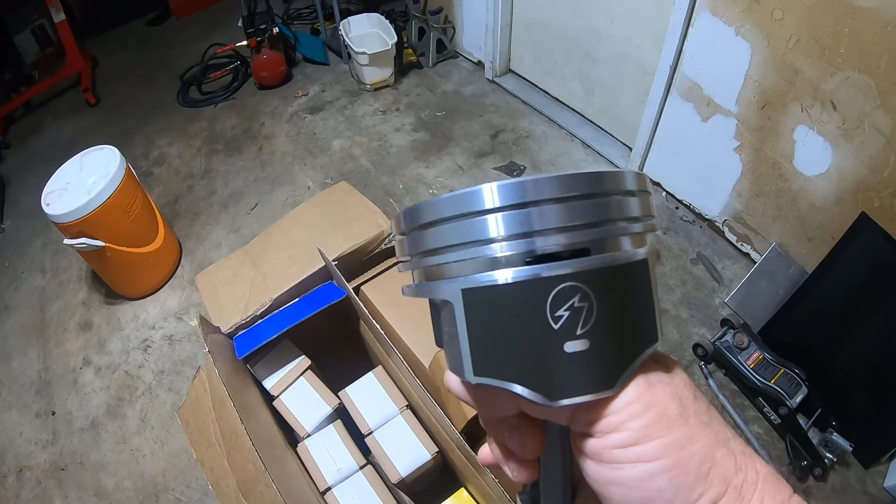We got one of the pistons out here. These are hypereutectic pistons, which means they have a high silicon content in them with the aluminum. That helps with the heat transfer, and they don't expand as much under heating. So you don't have to worry about cylinder binding as much in the bores as these get really hot.

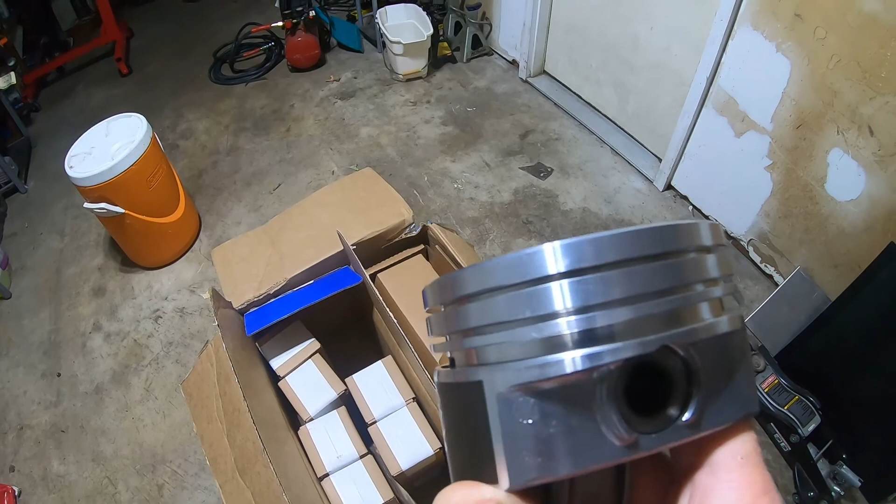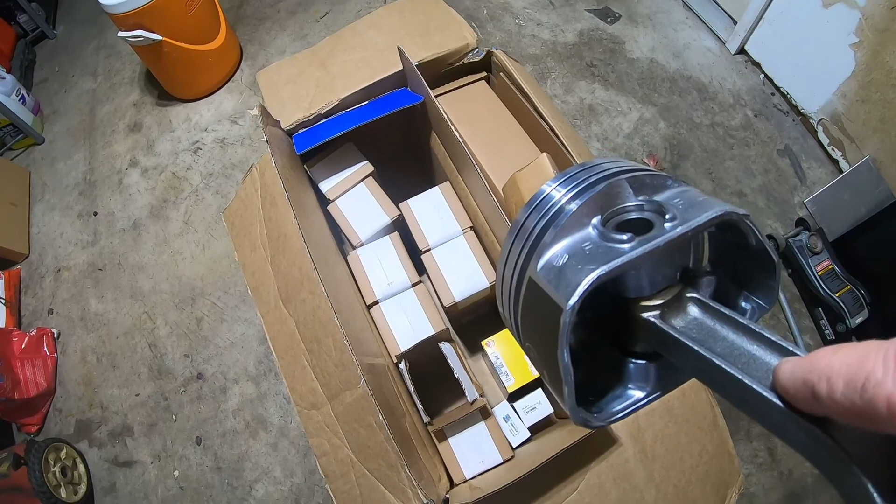I was surprised. It said in the description of the kit that it had pressed pins, but it was not assembled, but they came assembled. So that's money I'm going to save right there, because the machine shop's not going to have to heat up these wrist pins and connecting rods and press them in. So that's already done. Nice with the shaky sound on it.

So another good thing about this isn't unique to Eagle. Almost everybody making pistons now is putting this Teflon type skirting on it to help with it sliding through the bores, less friction. So that's that silver titanium pewter or whatever color look to it. So they do have the skirt protection on it.

There's your ring grooves right there. Top compression, second compression, and then the oil scraper and the 2 oil rings go in this bigger channel down here.

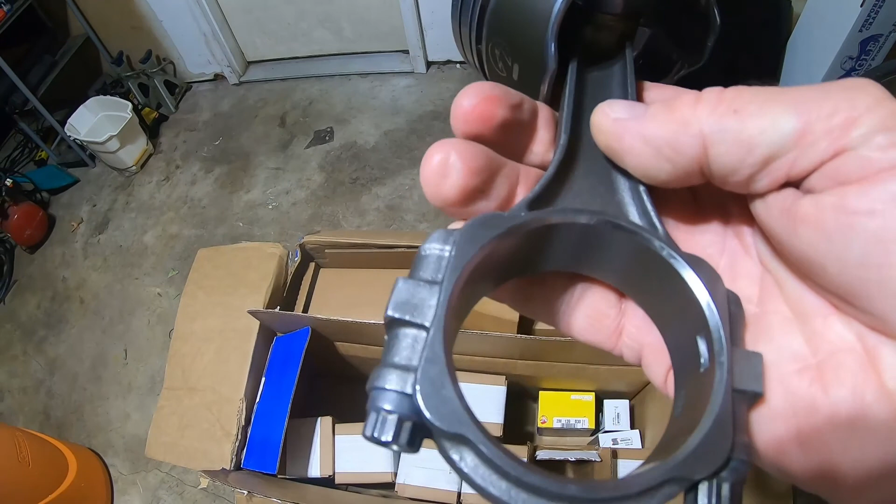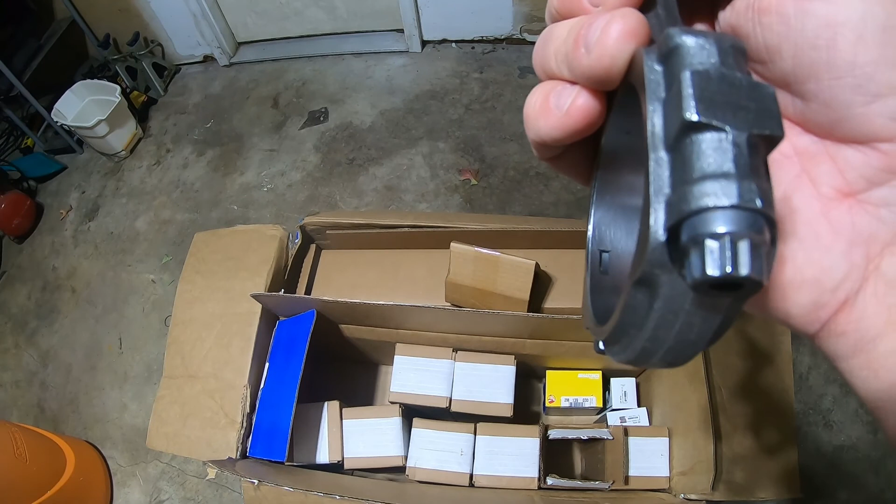Now, one thing about these rods, they're not high performance, but they do say they're rated up to 500 horsepower. The first thing I noticed on them is that these are not cracked rods. They're cast rods, but either way, they were not made as one piece. So they don't have the cracked separation joint. These are just kind of put together as 2 different pieces and then bolted together.

So they're not technically as strong as cracked rods, which are matched to each individual casting. They'll cast the lowers and then the rods themselves separately, and they just, I guess, do light machining so they're flat and fit together. I don't know if these are ARP, let me read on these. They do have ARP bolts, connecting rod bolts right there. So those are really nice.

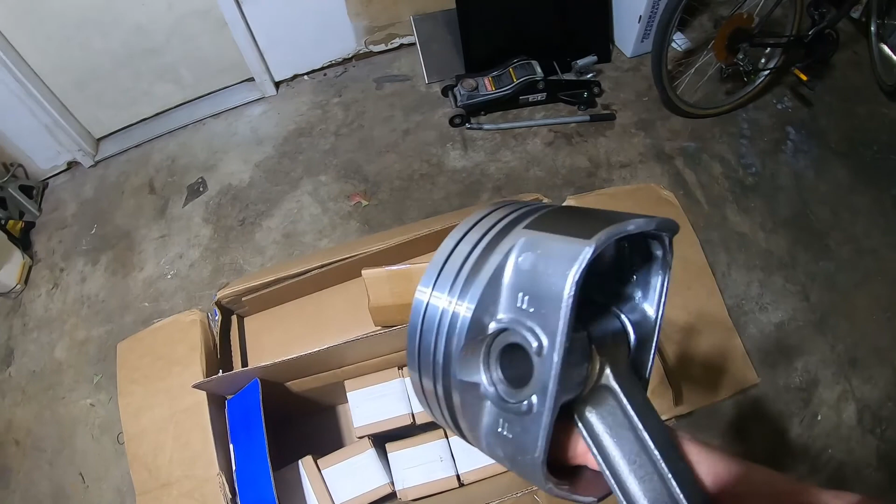Everything I've read is these pistons work great. For anybody that isn't trying to blow through the quarter mile at warp speed, these things make great street/strip pistons. So that's why I went with them.

Came with a ring set. Now these are steel moly. They're not chromoly rings. These will be fine. I'm not going to do any real boosting with these rings or anything like that. So I can accept a little bit of expansion with heat, and I'll just gap them if I think I want a little extra protection.

Instead of going like 16 to 18 thousandths on the ring gap, I'll bump it up to 20, 22 thousandths. I'll file them off a little bit just to get a little extra protection. Make sure they don't bind up if I do get really saucy with it at some point.

Hastings rings, which I've heard of before in my limited experience with engines. I know the manufacturers, and Hastings has been around for a long time, so I have no doubt these rings will be good. It's got the 3 different sets. I haven't cracked any of this open yet. All the top rings are here.

And you got your second, well, these are your oil rings. I always call these the wiper. It's those little squared groove rings. I always called that the oil wiper for some reason. But anyway, they're there. Here's your second rings right there. And then the oil rings that go on top and bottom of the wiper are down here. So got all the rings.

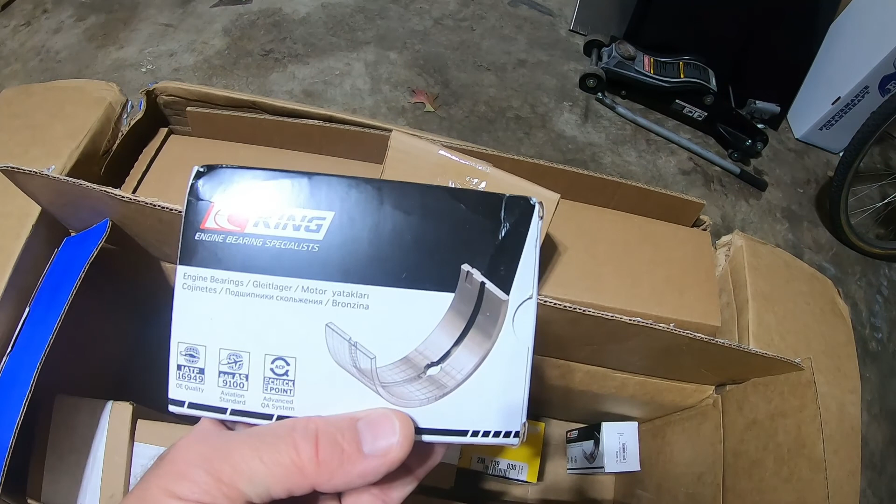It also came with bearings. Now, King, I have not necessarily heard of as a bearing manufacturer. And I'm not sure these bearings are the ones that are going to end up in the car. I may step up to better bearings. I'm going to do some research on them. I don't even know what these are made out of, if they're just aluminum bearings or whatever other type of material they use to make bearings. Just going to have to get on the interweb and see how these rate out.

Bearings are so important. You do not skimp on bearings. And if I can find a better set, I'll probably get those and just set these aside or sell them or whatever. So anyway, those are the main bearings. Then we got the rod bearings right here. Same manufacturer, same material. So same deal. I may step up for better bearings all the way around on this engine.

Then the other part of the rotating assembly, down here, there's our brand new crankshaft. Look at that guy. I am not going to take this out of the plastic until it's absolutely necessary. I do not want to, in any way, shape, or form, damage this thing. So it's a nice, new, cast steel crank. Heavy as hell. I'm not going to move this at all. I'm not even going to think about it.

I'm actually currently hurt right now and under some doctor's care. My back is messed up, so I'm not going to be doing anything silly. But let's see if I can get this.

I just noticed this when I was looking at it, but the oil journals in the crank have a nice chamfer on them. I don't know if that was ever done from the factory; I always thought that was something somebody did after the fact. It's kind of a hot rodding tip. If it is, then they've already done it for me. If not, I'm just mistaken and never noticed that that's the way oil galleys look on cranks from day one. I just never paid much attention to that part.

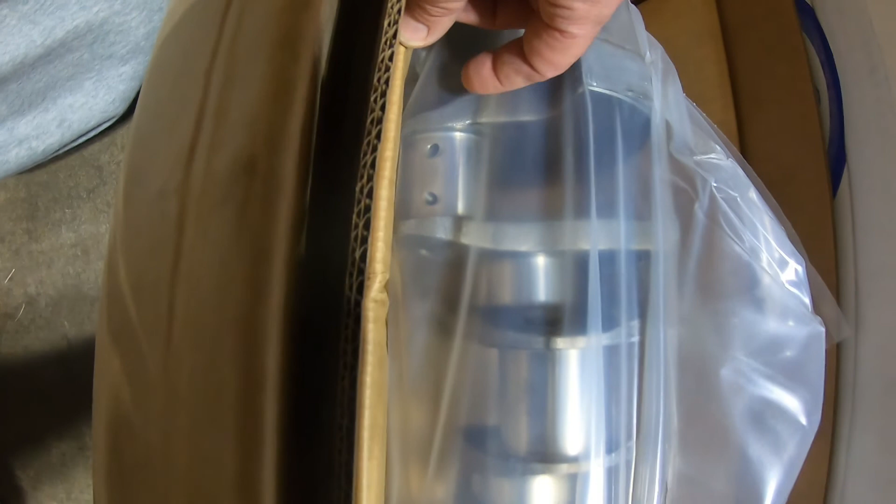Now this is an internally balanced assembly. They say it is, and I'm going to take their word for it because I don't want to spend a whole bunch of money and time weighing out the rods and doing the bob weighting and getting the machine shop to grind and match and all that. They say it's internally balanced, taking their word for it.

It says right on the website that you can get a neutral balanced flywheel and a neutral balanced harmonic balancer on the front. You'll be fine. So that being said, we're just going to leave it the way it is and just assemble it as it came out of the box.

Now, I get to do some long-term thinking now that I know what the engine block is going to be. It's going to be a 355. It's a 4.030 bore with a 3.48 stroke. So I can start thinking about what my compression ratio is going to be. I had these grandiose desires with this engine to maybe build it for boost.

I'm giving up on those, so I think I'm just going to cheat up the compression ratio when I put this thing together to get the most out of it naturally aspirated.

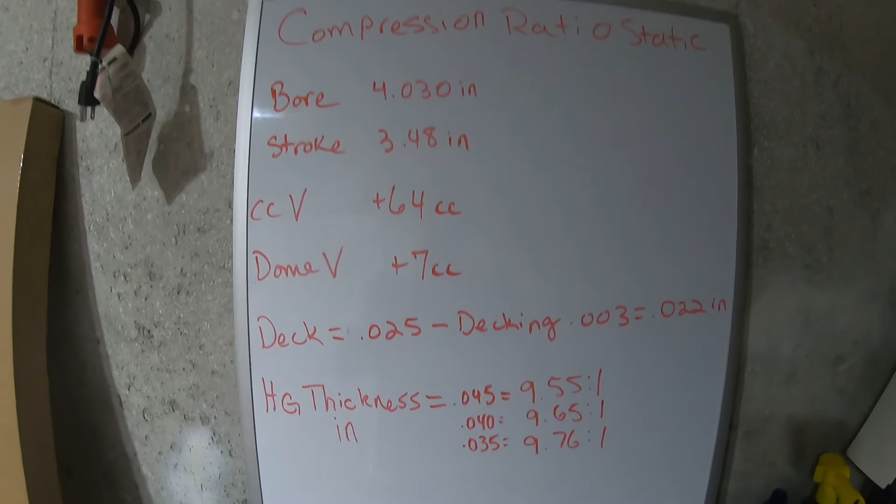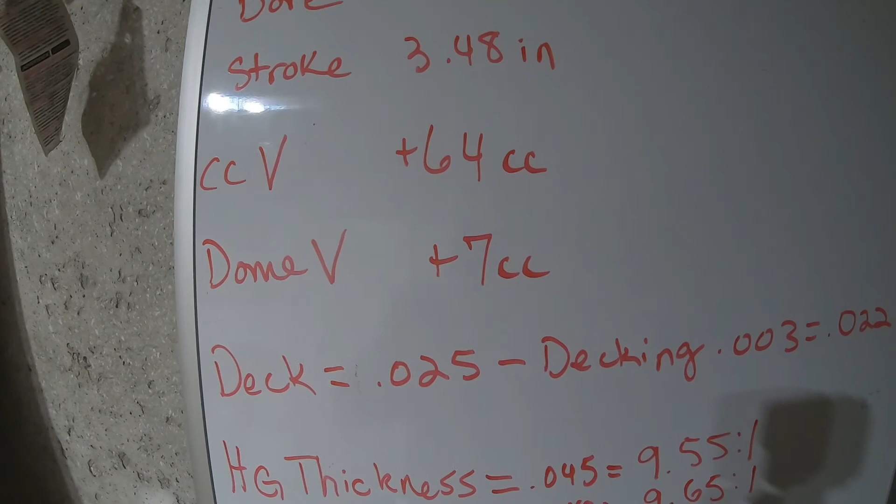So on compression, I've started to think about it now that I have these numbers set up here on the board. With a 4.030 bore and a 3.48 stroke, I am going to use 64cc cylinder heads instead of the 72, so that's going to give me more compression. These pistons were valve reliefed, so they are technically dished, not domed. They have extra volume built into them where the recess for the valve relief was cast out. Each one is 7cc's bigger than a true flat top, so I got plus 7cc's.

The deck height - I mentioned that the machine shop said they're going to have to do a little bit of milling on the block decks. .025, or 25 thousandths, is the normal deck height on a small block Chevy. They said they're going to have to take 2 or 3 thousandths off that, so that's going to leave me somewhere around .022 inch deck height. That'll be the distance between the top of the piston and the top of the engine deck. That's not the quench - it doesn't include the cylinder head volume and all that. That's just the height between the top of the piston travel and the top of the deck.

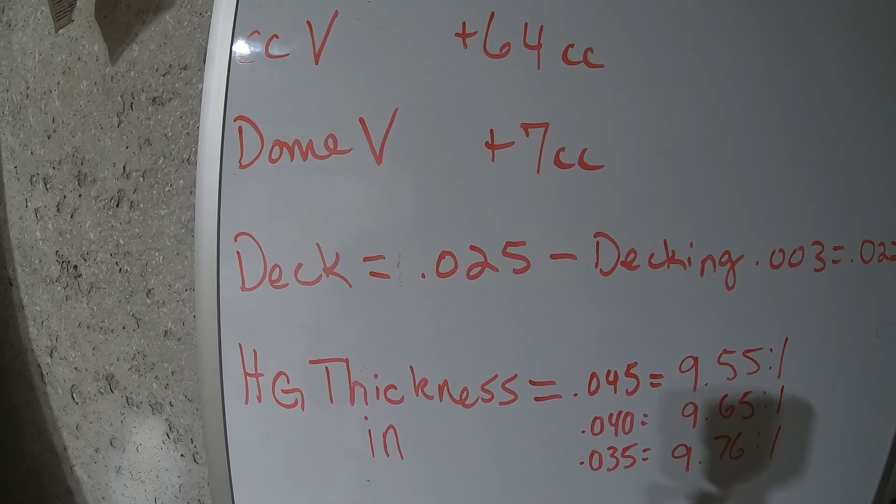Then head gasket thickness is basically all I have left to play with to determine my compression ratio. With these numbers, if I use a .045 head gasket compressed thickness, I'm going to end up with 9.55:1 compression ratio. If I use a .040, I'll get 9.65. If I use a .035, a nice thin head gasket, I'll end up with 9.76. Probably going to go somewhere around the .040 - end up with a nice even 9.65.

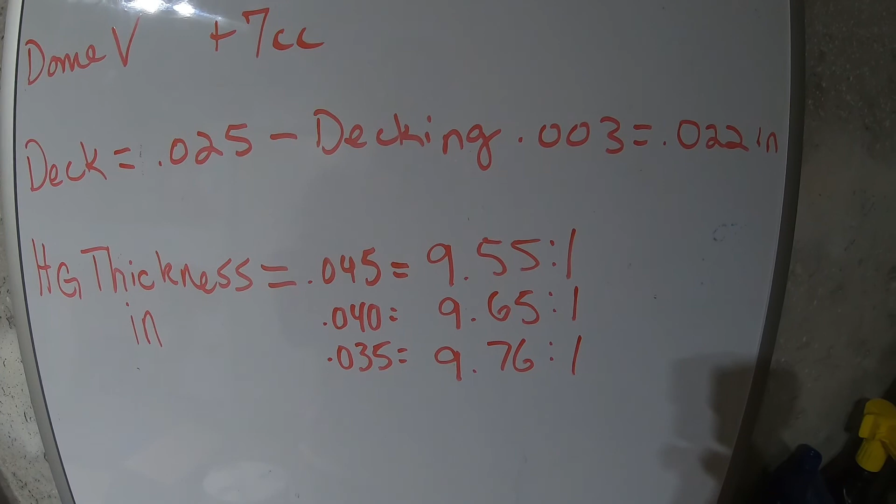That's going to be pump gas friendly, at least for 91 octane. I'm not going to run 87 on it with a 9.65, but I can run 91 octane all day long and not have to worry about knock. That should produce a fair amount of power - it should get me in that 390 to 410 horsepower range that I'm really shooting for out of this motor.

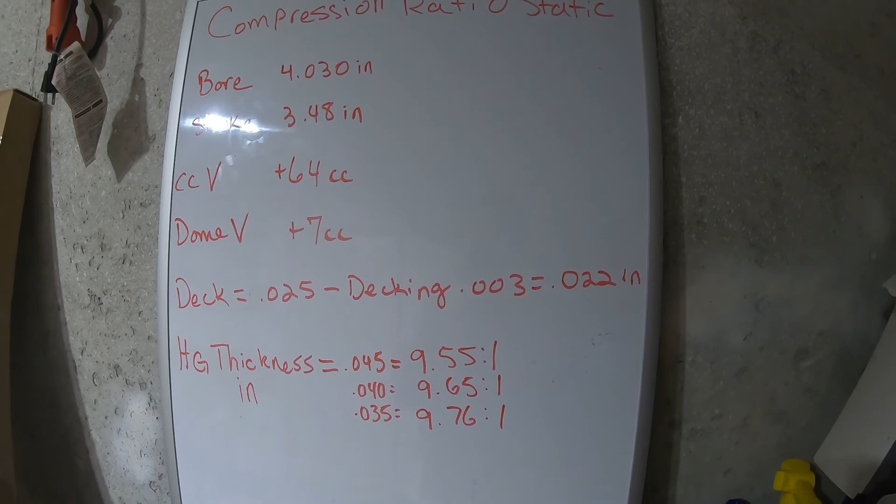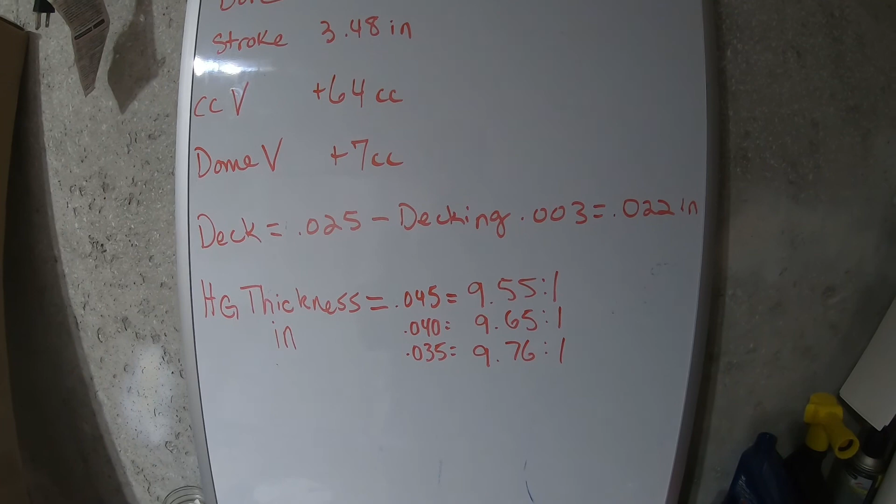Then there's other things to consider that I'm going to have to think about. I've already kind of half calculated this, the static compression ratio, by the way. There's 2 different compression ratios, your static and your dynamic. Your dynamic compression ratio is affected by your camshaft. You have to take into consideration the intake valve closing point on your cam, because as the piston's coming up, if your cam profile is allowing your intake valve to stay open on some overlap, you're actually going to be pushing out some of the air that could have been compressed back up into the intake system, into the runners, and you'll lose some of the fuel air mixture that you can compress and explode. So in most circumstances, your dynamic compression ratio is lower than your static compression ratio.

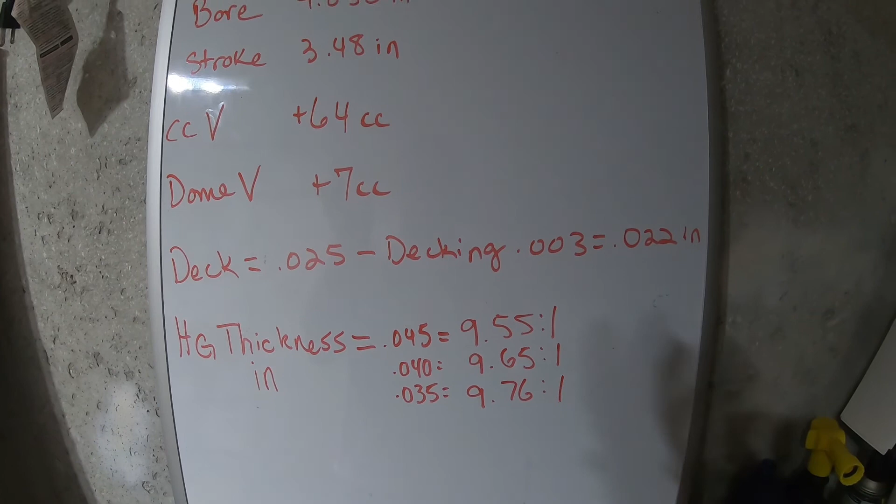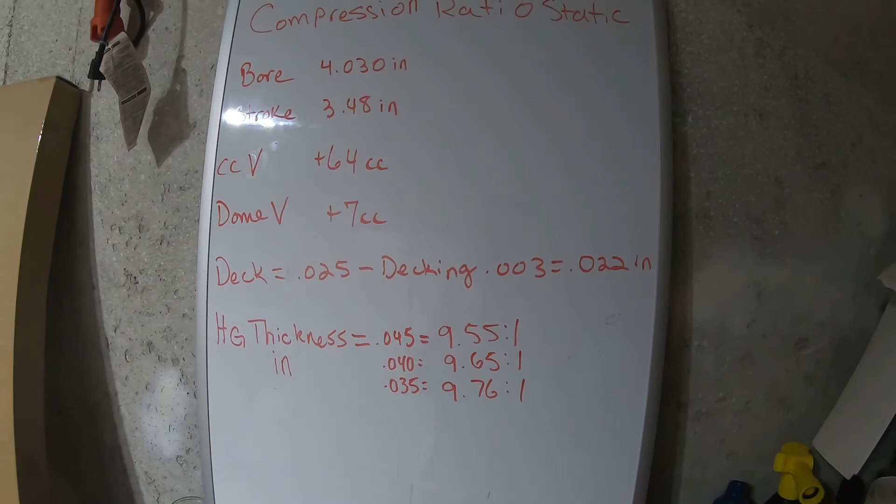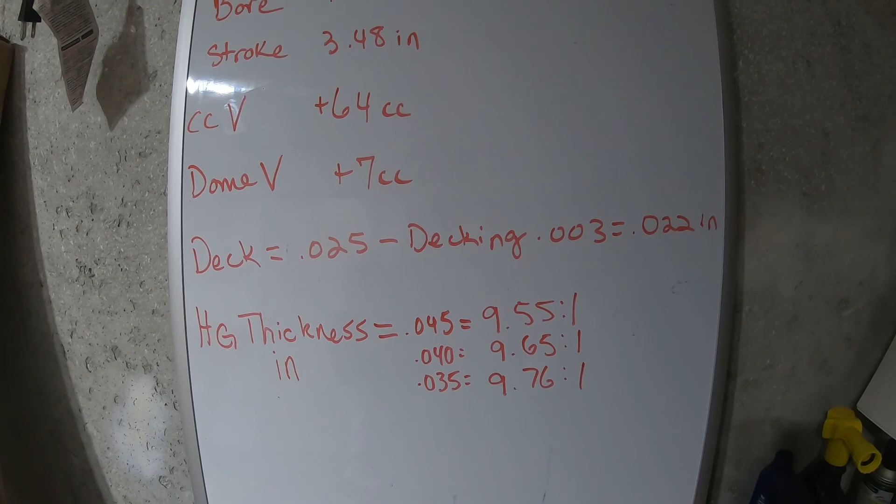It's actually the dynamic one that really matters when you're talking about whether or not you can run high octane fuel, or boost. So you wanted to run turbo or supercharging - you're like, oh man, I really want this nice 10.5 to 1 engine, but I'm worried about it blowing itself up. Well, go do the math and check your dynamic compression ratio. If you choose the right cam, you're going to find out that 10.5 to 1 engine is actually probably closer to 9.5 to 1. Standard IVC, intake valve closing point, at 50 thousandths lift on a cam is like 41 degrees, which means 41 degrees of cam rotation on that lobe.

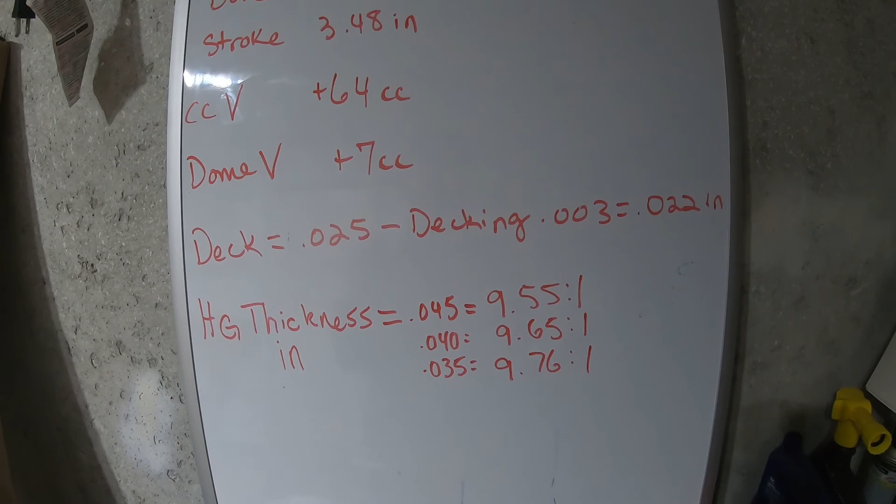You're getting the valve still open while the piston's starting to come up, so you're pushing some of that potentially compressed air out of the cylinder, and it's lowering your overall compression ratio. It's getting a little advanced, and I understand it, but I'm not going to sit here and dwell on it too much with this little video. This is mostly just an update about what I'm going to get out of this motor.

But you know what, I'm going to pause here and maybe draw a little demonstration of what I'm talking about, that dynamic versus static compression ratio.

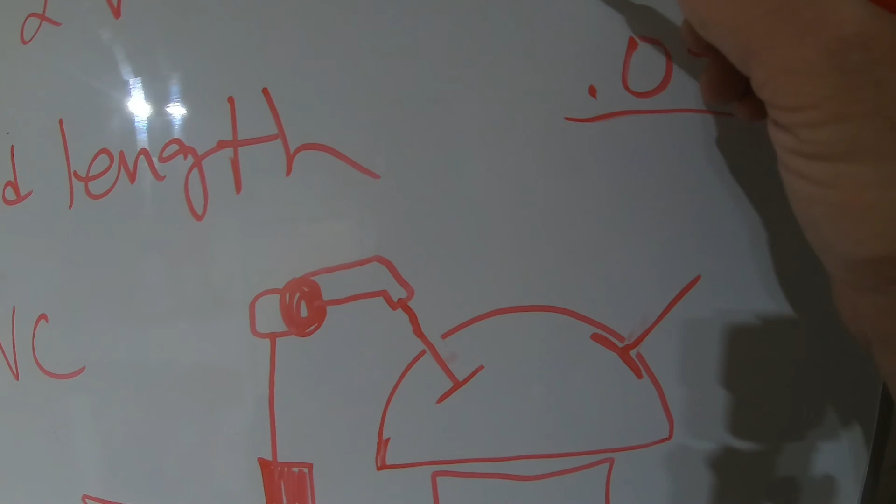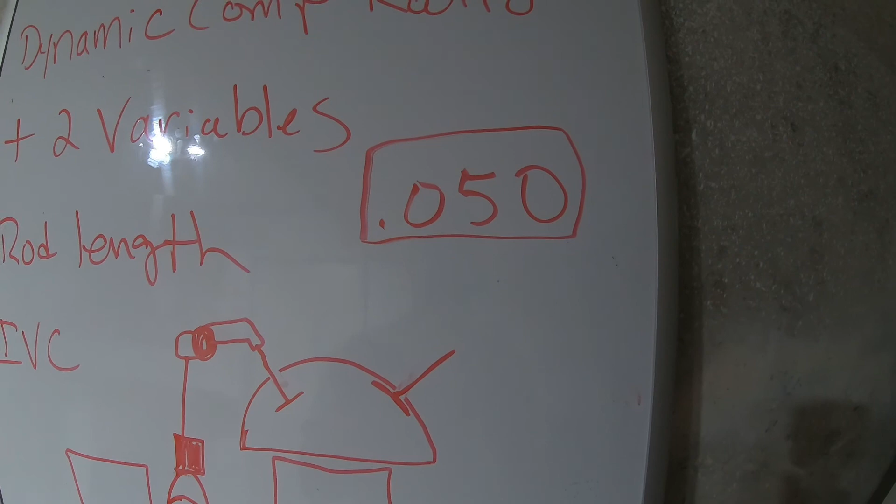Okay, so I'll talk about the dynamic versus static compression ratio again. In a dynamic compression ratio, you add two more variables to the list that was there before for static compression, and those are your rod length and what's called the IVC, or intake valve closing point. IVC is usually measured at 50 thousandths. Like everything else, it seems that's just a standard. There's nothing particularly important about that number, that's just where the industry has agreed to do all their measurements for commonality, so you can compare apples to apples between cams. So everything's measured at 50 thousandths lift.

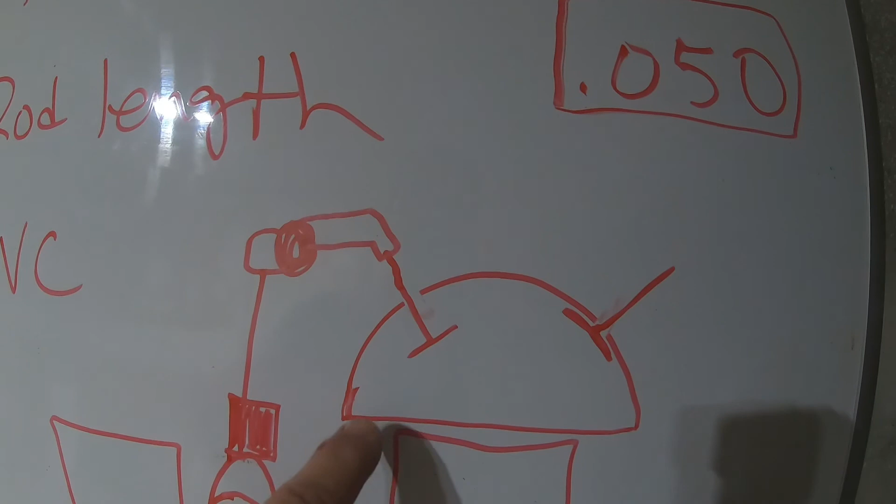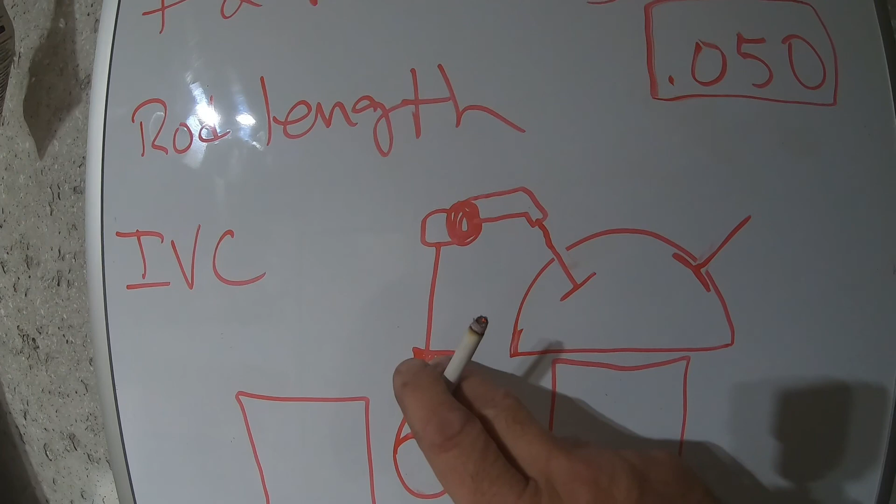Now here you have a cylinder head, valve, and piston assembly. This is your intake valve, and here is your camshaft. Of course, your camshaft has a base circle and then a lobe. The lobe pushes on the lifter, the lifter pushes on the push rod, which connects to the rocker arm. Got your rocker arm here, a rocker arm ratio of usually 1.5 or 1.6 to 1, which means for every 1 it moves here, it pushes down 1.5 here. So you get more lift with less travel of the push rod, and you can keep shorter push rods that way.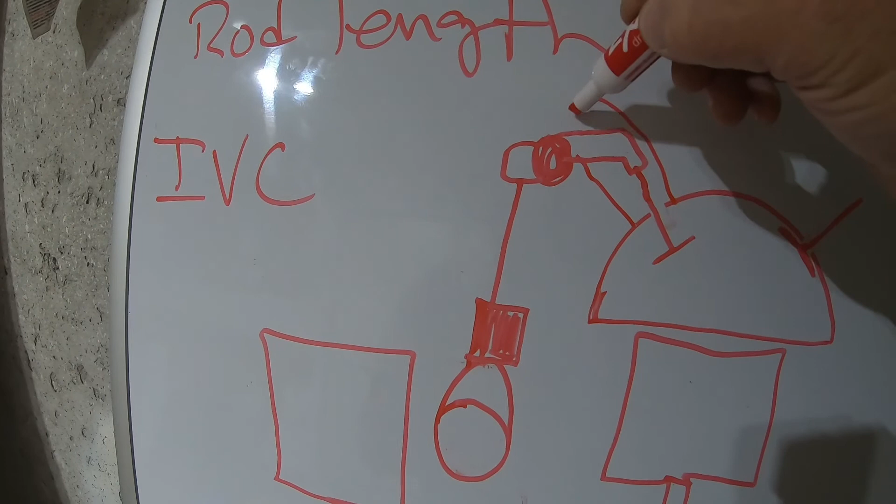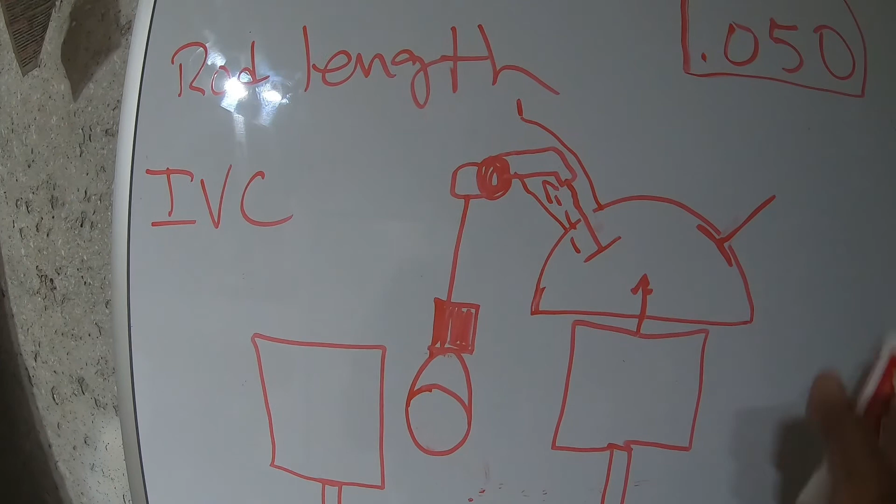But as it relates to dynamic compression, if you look, as the piston travels up through its rotation off the crankshaft, there is an overlap between when the intake valve is open and the piston is pushing up. Imagine an intake runner coming off of this towards your carburetor and manifold. You will get air traveling back out of the cylinder as the piston travels up. So you lose volume, you don't lose surface area. Your cylinder volume is always going to be the same, that's the maximum amount of air that it will hold.

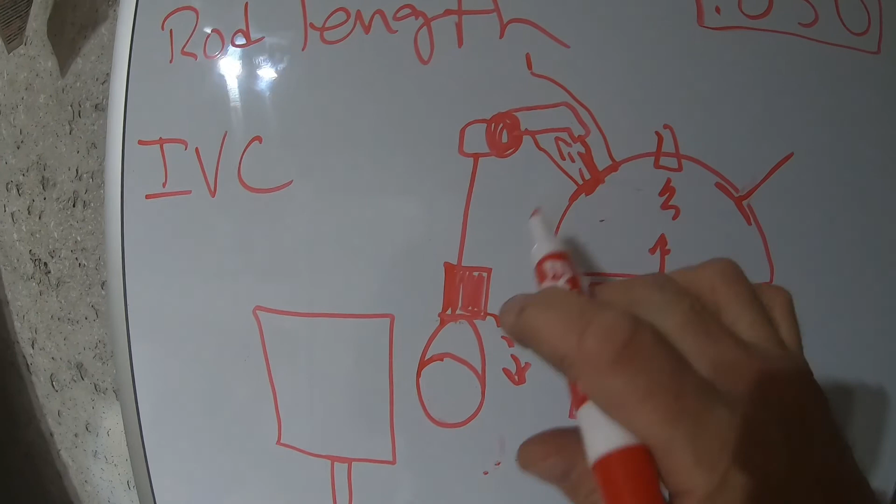But your compression ratio of that volume changes, because the actual point in which compression matters is when this valve, in its rotation off the camshaft, closes. Now you have a sealed surface that the piston can compress the gas and air mixture into, waiting for your spark plug to blow it up. So if you have more time that this intake valve dwells open on your cam lobe, that's going to reduce your overall compression ratio and lower it to a safer limit than you actually might think you have.

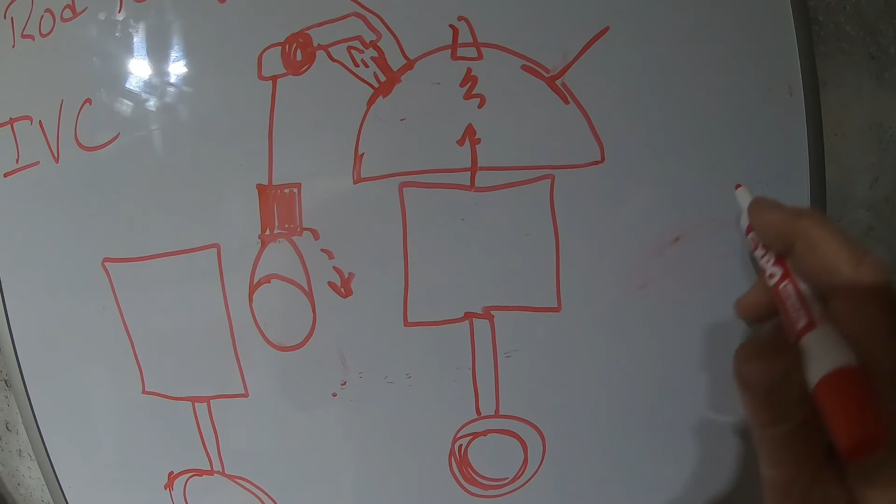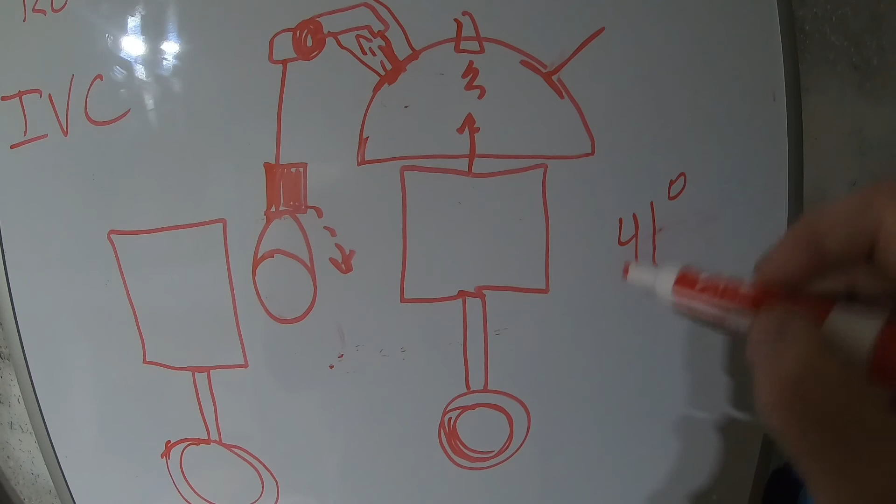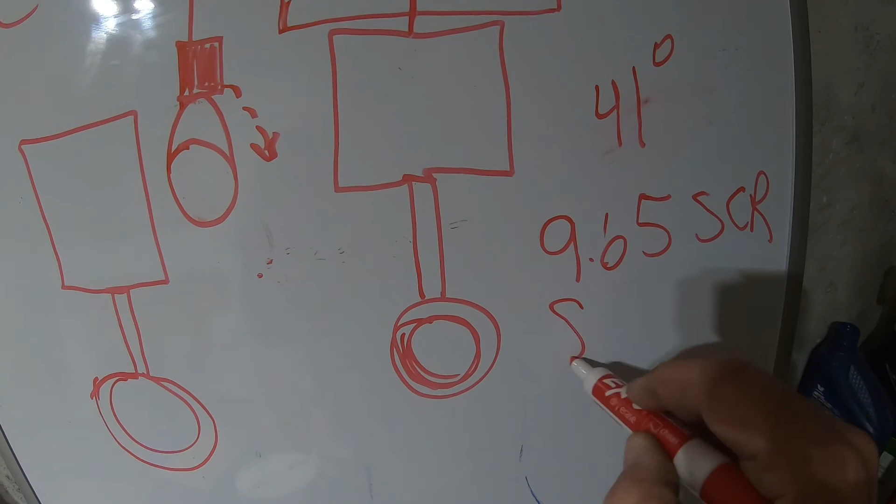Now, I did this just based upon a standard IVC of 41 degrees, which is kind of a standard for the comp cam I was looking at, for the dwell of that valve being open. At that point, off of that 9.65 static compression ratio, my dynamic compression ratio was only about 8.5 dynamic. So that's the number that really mattered.

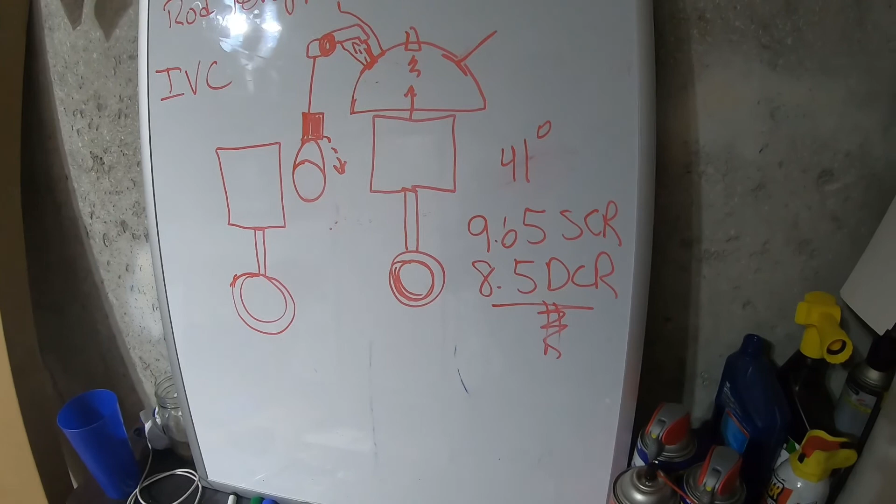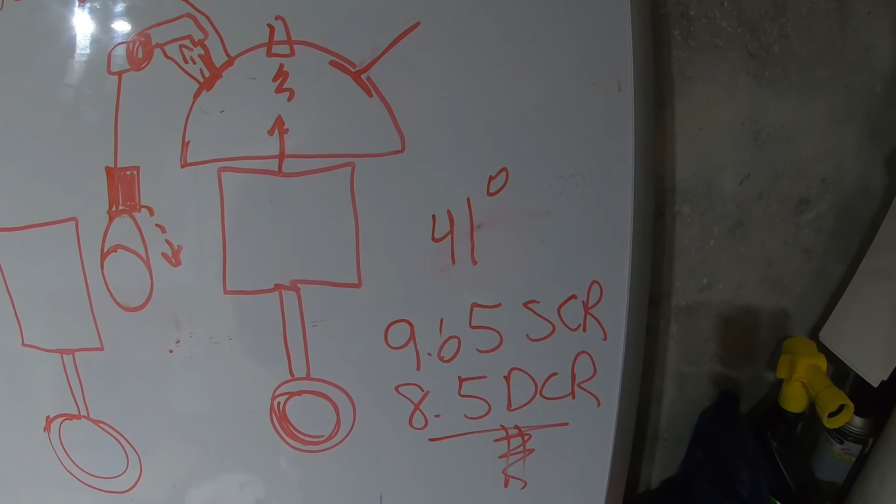So even at 9.65 to 1 static compression ratio, if I slipped those piston rings so that they're gapped a little bit wider, I could still boost this motor and not have to worry about it too much. I could probably run 7, 8, 10 pounds of boost on this and be okay, even at 9.65 to 1 static compression. So I'm safe that way.

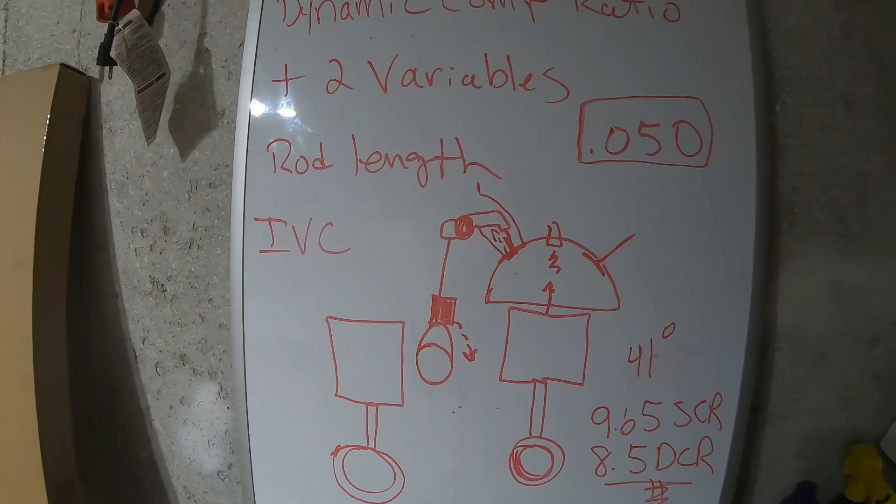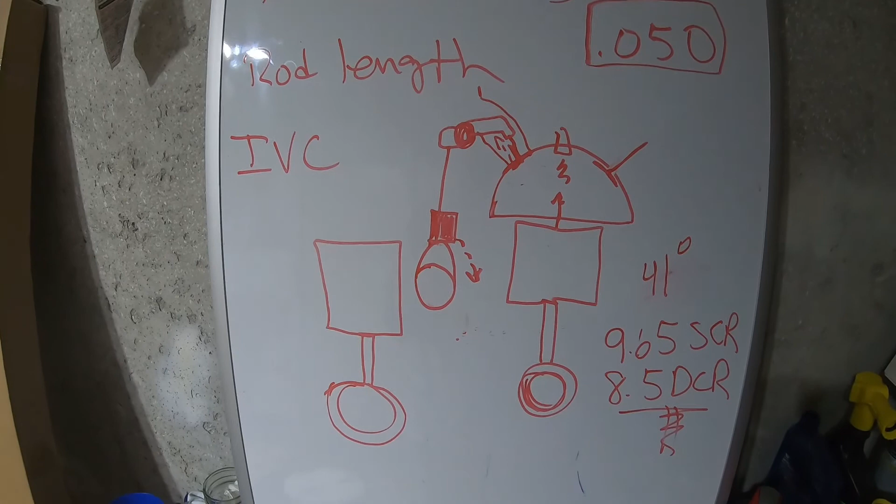Still don't think I'm going to do it. It's only a 2-bolt main, and I'm not trying to throw the bottom end out, but that's just something to consider. When everybody starts talking about compression ratio, oh yeah, I got this 10.5 to 1 motor, do you really? When you were doing this build, did you take into consideration your cam profile, and have you looked at the amount of dwell of your intake valve while the piston's traveling up and trying to compress the air? There's other issues involved.

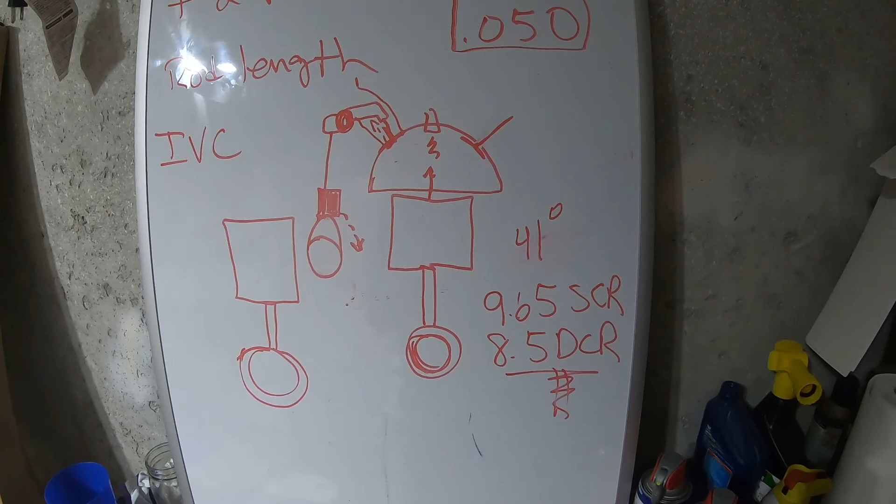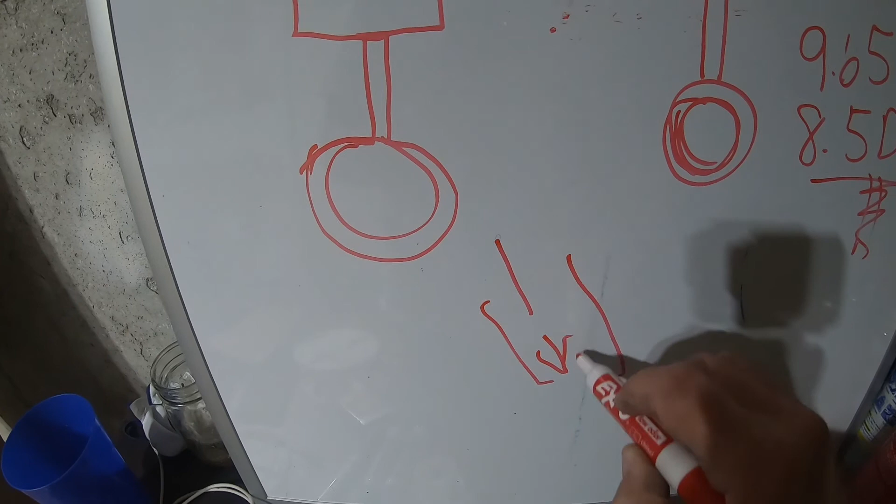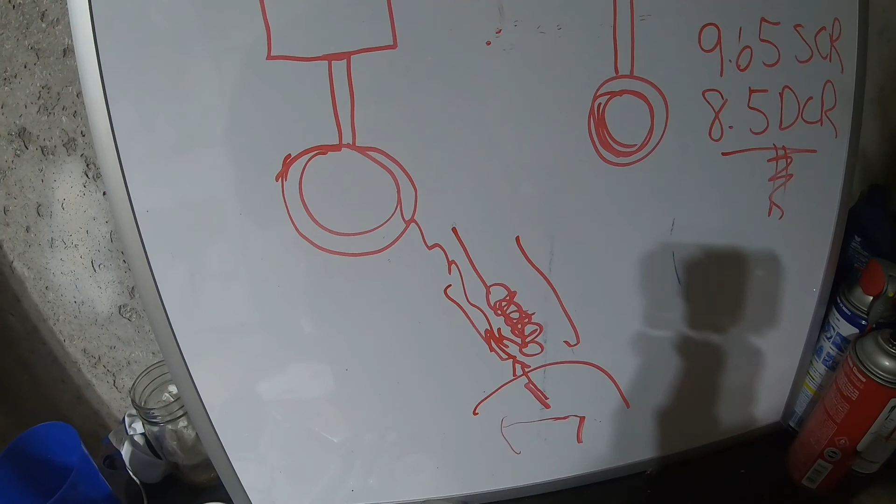This creates turbulence in your intake, which a lot of you have heard about. I showed you the intake coming up there. You get resonance in your intake port as volumes of air try to make their way down into the cylinder, and then you end up with reverse flow of air from the piston pushing it back up. That creates turbulent flow that can actually resonate all the way up your intake and really screw up your flow.

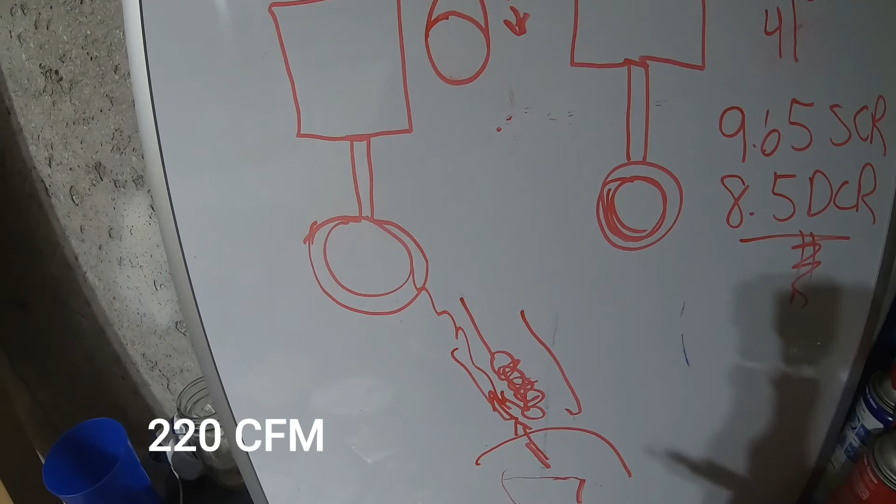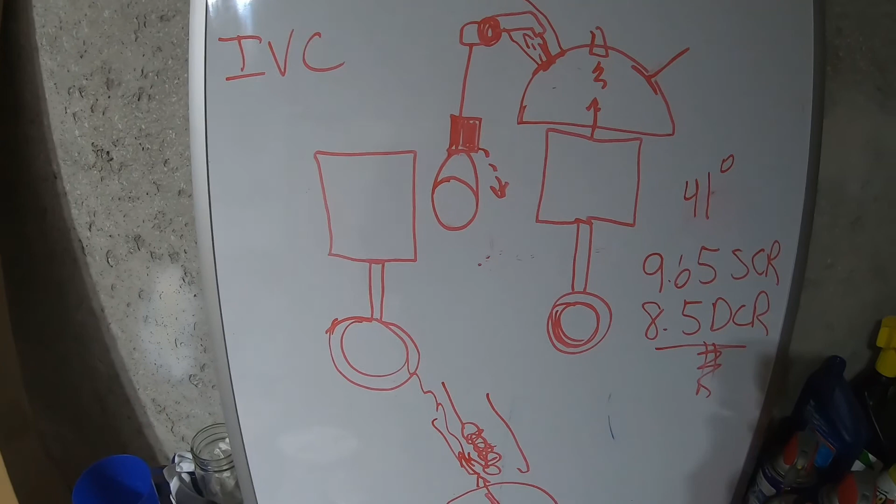So say you've got 220cc combustion chamber heads, but you haven't done the math right and you've got the wrong cam. You're going to be throwing air back up into that big 220cc runner, and you're not going to get 220 CFM out of your heads. You're losing power. I'll probably do a whole other video once I get this nailed down on my cam to show how important it is. You can get the biggest, baddest everything in your motor, but if you haven't matched your camshaft to it, you're wasting money and wasting power. Worse yet, you could be blowing up your motor.

Let me do a silly little demonstration about some of these aggressive cam profiles I've seen. You know, 500 thousandths lift, half an inch, is like the magic number. Everybody wants a half-inch lift, maybe a 520 exhaust and 500 intake lift. Those are good, but how long is it staying open at that half inch? If you've got a nice broad lobe on your camshaft and your lifter is able to ride that lobe a little longer, you'll get that 500 thousandths lift with more time for air to make it into the cylinder.

That's half an inch lift. But if you get a cam that's shaped like a pyramid, you might get 700 thousandths, or 7/10ths of an inch, of lift. Big lift, but your lifter is just going to be like, I'm done. Congratulations, you opened it this far for 0.003 seconds versus opening it this far for 0.25 seconds. Which one do you think is going to give you more volume in that cylinder to burn?

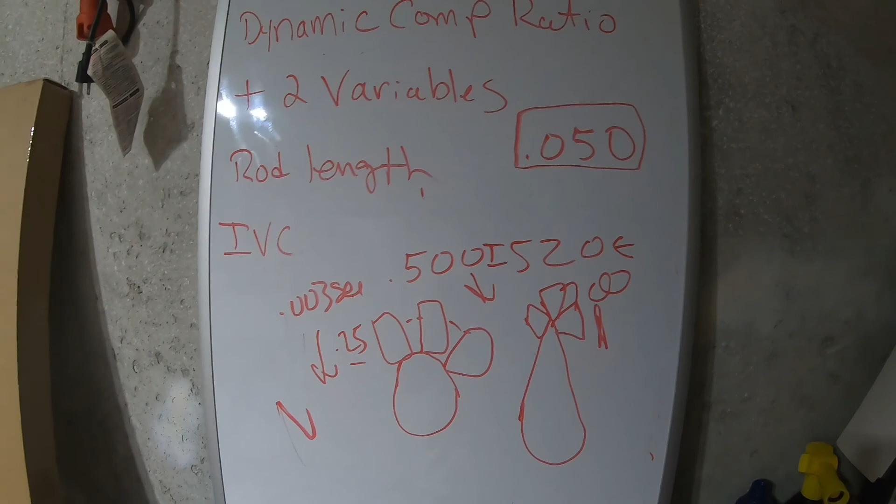Are you going to do your driving between 3,000 and 6,000 RPM, or between 1,500 and 4,000 on the street? All of that matters, and we'll go through it in another video. Cutting myself off here, I'm going way long on this, way more information than I thought I'd be putting into this one. But back to the cool stuff.

We've got engine parts. It's happening, like 30 years in the making, and I've got this stuff in my hands right now. Tomorrow I'm taking the pistons to the machine shop so they can measure them and piston match them to the bores. Hopefully that'll all be done within a couple of weeks, and I'll have that block back on the engine stand, upside down, throwing that crank in.

Another thing I'll leave you on, I'm probably more proud of this than anything: I have a clean garage, somewhat organized, with room to work. Probably the biggest thing that's come out of this whole project is getting this garage usable.